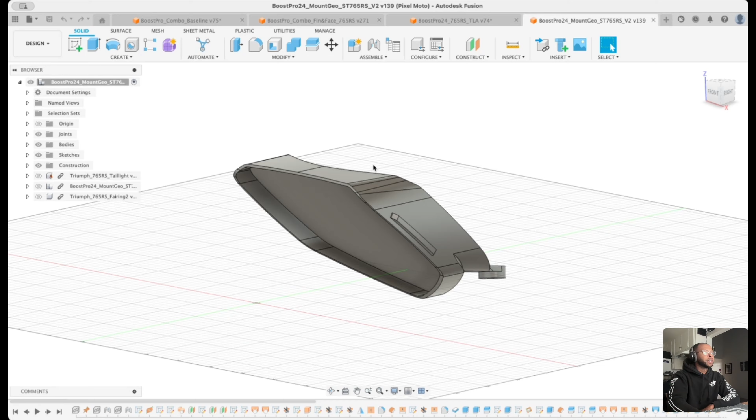What's going on, guys? Wanted to do a little bit of a spotlight that would cover some of the CAD parts that I built out in part one, as I'm not going to touch them too much in part two, but a lot of interesting work went into them.

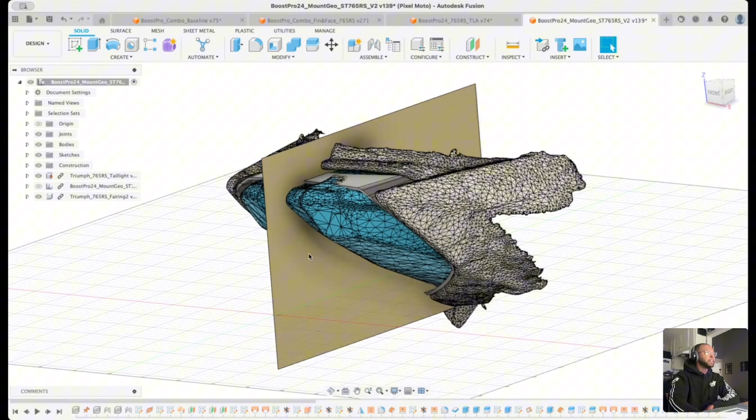So there's four main parts that I want to go through, and so I'll jump right in with this first one being the geometry, the back half of the geometry of the taillight. I built out a couple of different parts in this. And so I had, there we go, the fairing 3D scan that gave me a pretty clean edge on the inside. And then I also had the taillight scan that I was referencing for this.

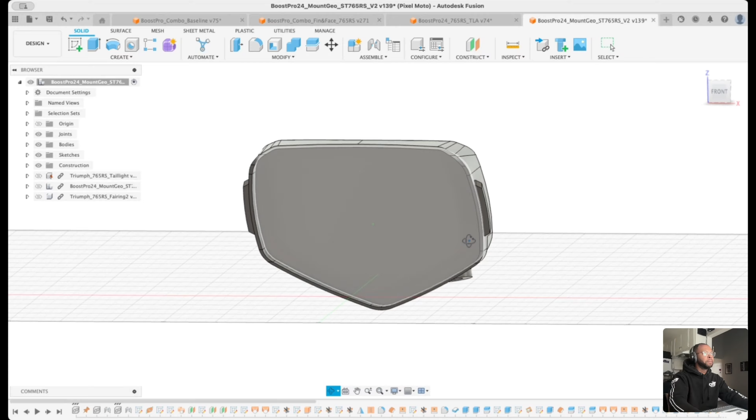And from using those as a baseline, I could start to get some of these simple shapes like this arc on the side, a very minor arc on the bottom, and then most importantly, the bolt points at the back. Another one that was pretty clutch to have in here was this kind of key slot for this geometry piece that I'll show you guys in another part that slid in the back to keep the top half of the light in place. But this ended up coming out pretty clean.

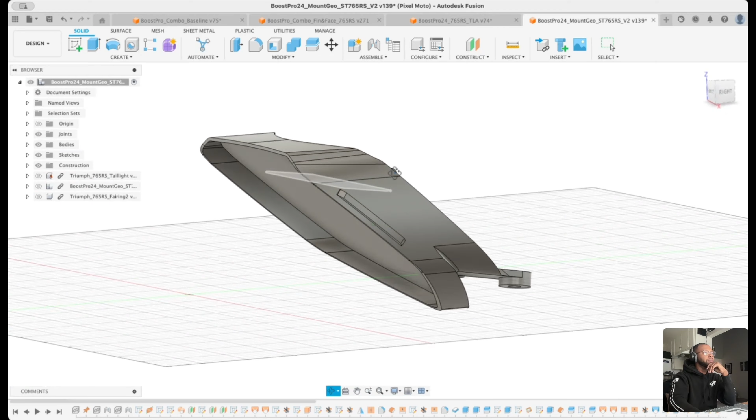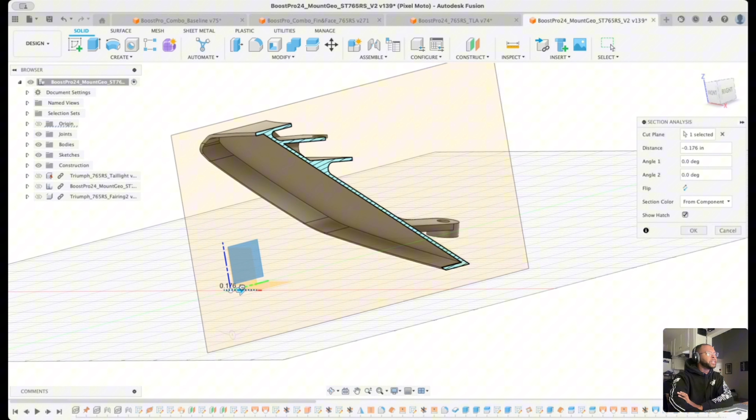But yeah, I did probably like 30 3D prints on this part alone, just trying to get it right and getting it to fit into the bike. And I'll also show the section view. As I mentioned, I wanted to keep this stuff pretty thin, and so this has a pretty continuous 16th of an inch thickness throughout the entire part.

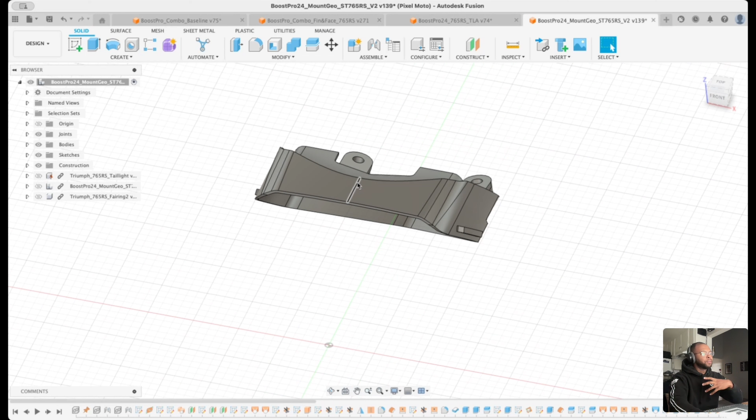No real innovation here, as this information and geometry was already defined in the taillight that came from Triumph. But as I started to build out my own taillight, I needed to basically redo all that geometry and design it for being on an aluminum part as opposed to an injection molded part.

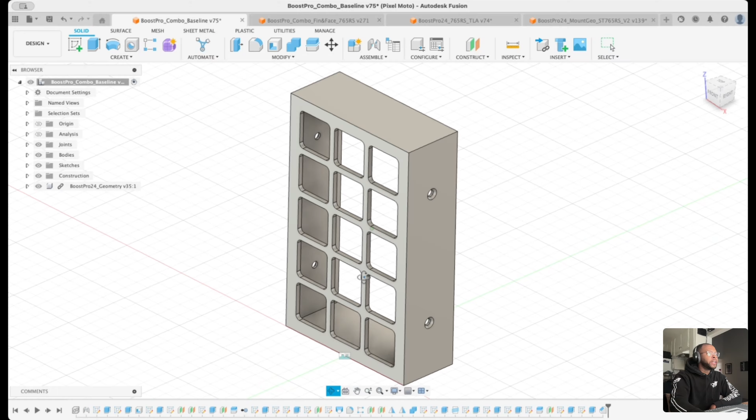The next part that I built out was the main face, which I called the baseline part. It gave me the baseline geometry of the rectangular taillight. So this had the 3x5 grid on it, which is very simple. But the part that took quite a bit of time was figuring out the correct size and pattern of the taillight. I knew I wanted to have a 3x5 so that I could do like a 3-2-1-0 for one of the animations.

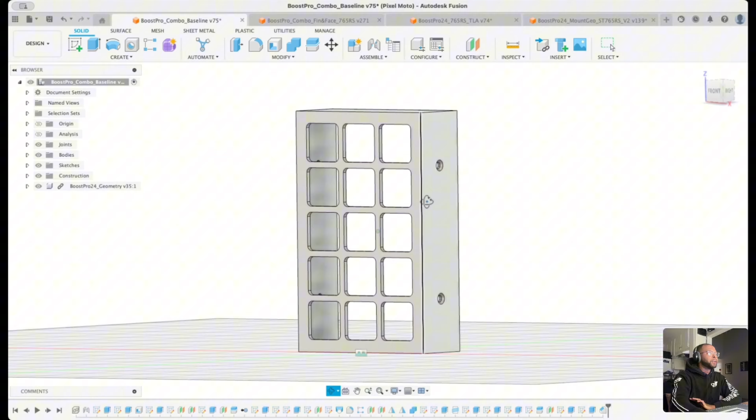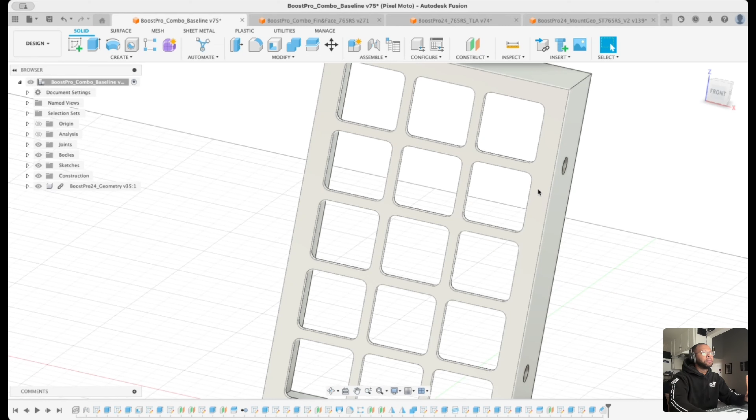So figuring out the pattern was important, but also figuring out this distance between squares and the edge here. I wanted to give enough distance to give me a nice overlap of the diffuser that was going to go in here. Also, not make this face or this part too wide, where the thickness and border took away from the actual squares themselves. So this baseline part was very important.

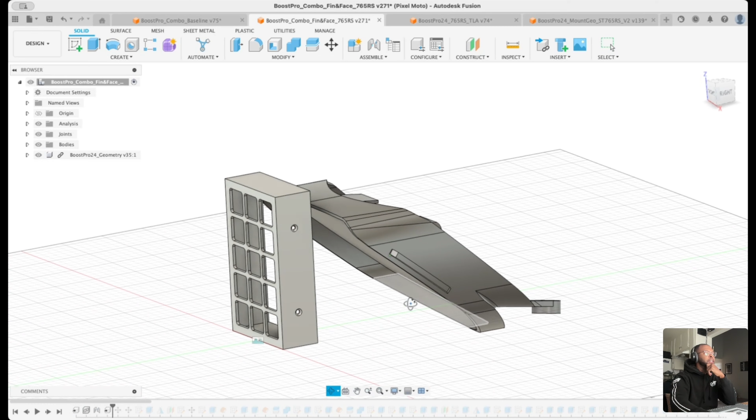And then when you come over into this combo part, see how the parts looked when they came in. So that's the baseline part we were just looking at, and this is the back geometry I was talking about. Splitting up these parts is just a trick I learned from working in aerospace: the less complexity you have in a given part, the easier it is to actually change everything, because similar to SolidWorks, Fusion 360 is parametric.

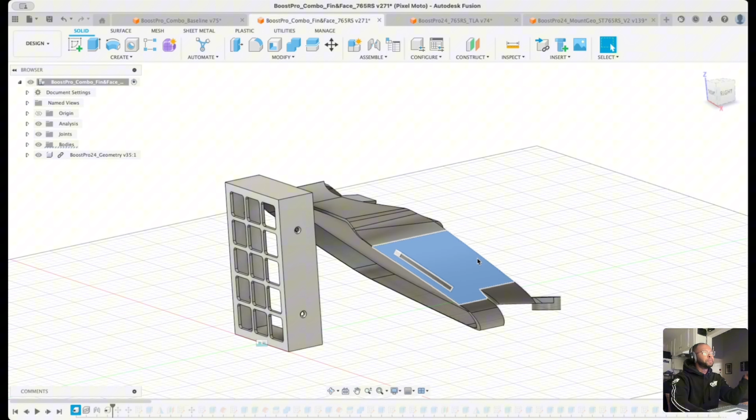So if I change a detail on one part, once it's been put into an assembly, I can go back to the original part and edit it, and then the assembly will reconfigure itself and update, and sometimes change features in other parts, and it works really well.

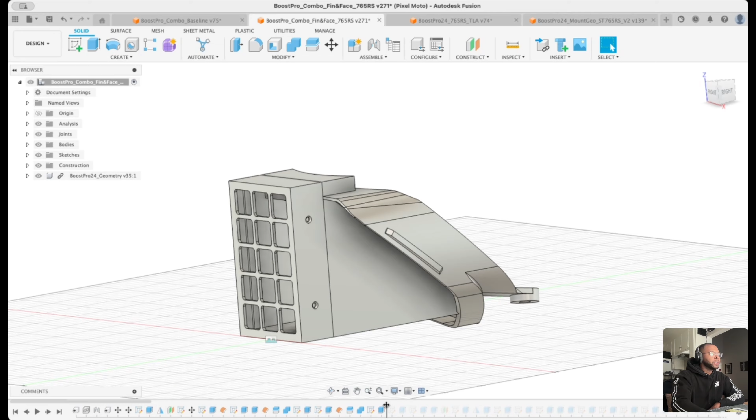So now to start actually making my way through the designing part, you can see I started to make some extrusions that would branch from the baseline part to the back half of the part. And since this part was still going to be machined out of 6061 aluminum, you can't just have a bunch of empty voids in here, because there's no way for even a 5-axis mill to get access to the inside of this.

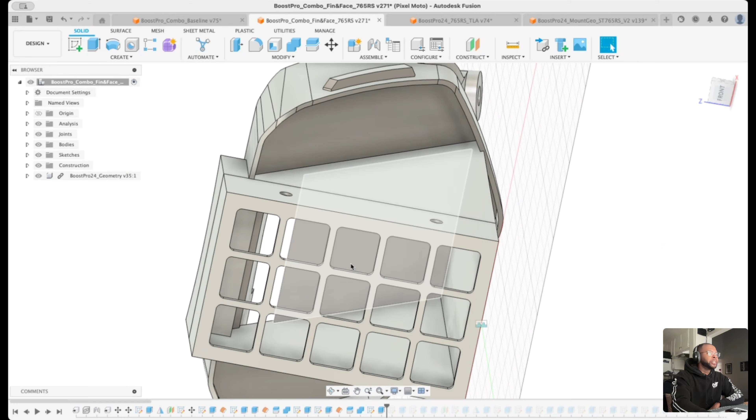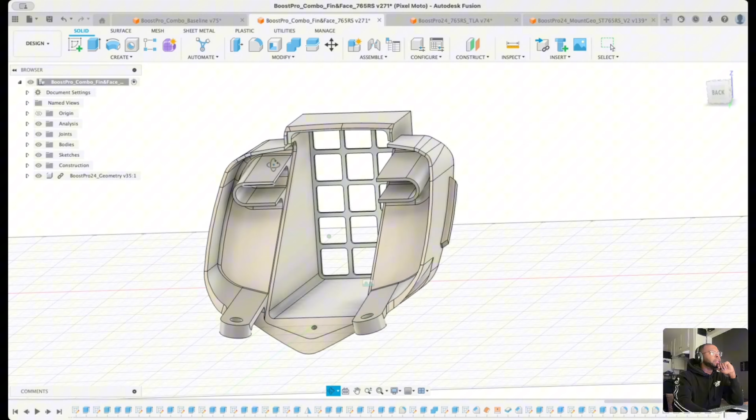So you'll see that I actually cut a big window in the back here. And then I actually ended up making a completely separate part that filled in that window. But you'll see I'll clean up some of these lines and cuts that I made on the inside of here. After I got all that cleaned up and did some fillets, I ended up with this main part that would be very easy to be machined, and I got some big fillets in here. And then I also had this second part that I had a rectangle in here for a connector to pop in, so that I could be able to get back out to the bike.

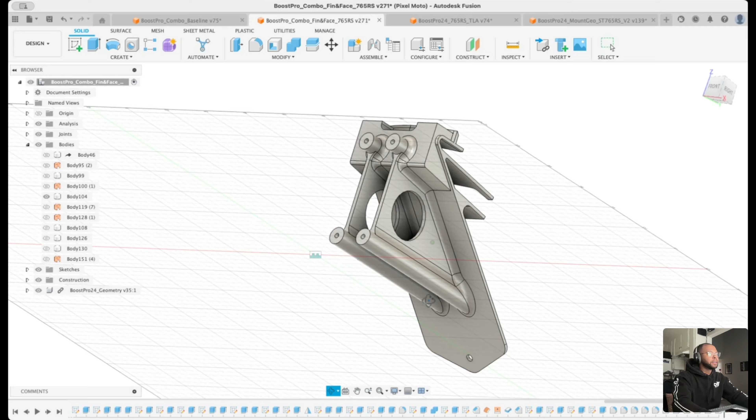So this is what the main enclosure looks like. And another thing to call out is that on that back piece, I made some extrusions that would reach out to grab the PCB board. And so these would be threaded M3 holes. So you could put the board right on the front and then bolt it down with M3s, and then the cable would go straight out. So yeah, that's pretty much all to call out for this part. And most importantly, got to have the Pixel Moto logo on the side.

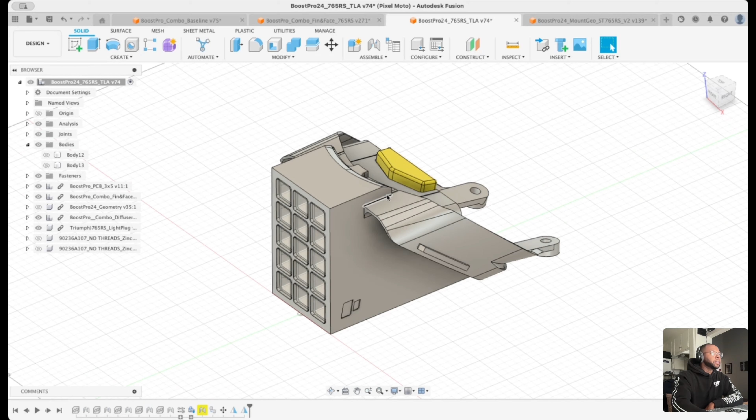The last part to show is the TLA, which is the top level assembly. This has all the parts combined into it. So it has the main diffuser, it has the PCB board that I'll show you guys, it has the reflector, it's got the main enclosure, of course, and then it's got this space claim for this key feature I was talking about. So I'm actually going to start with this.

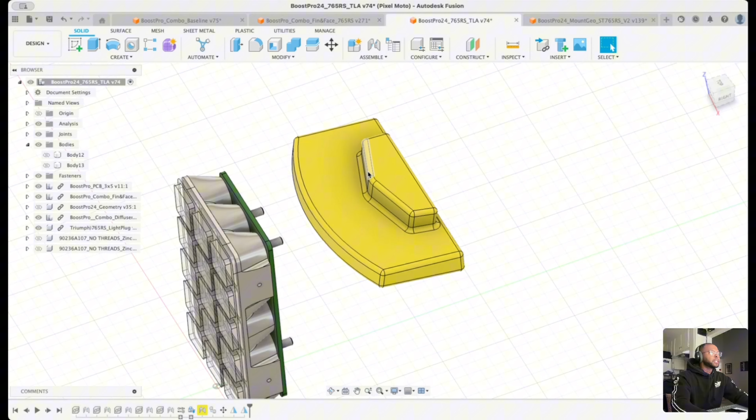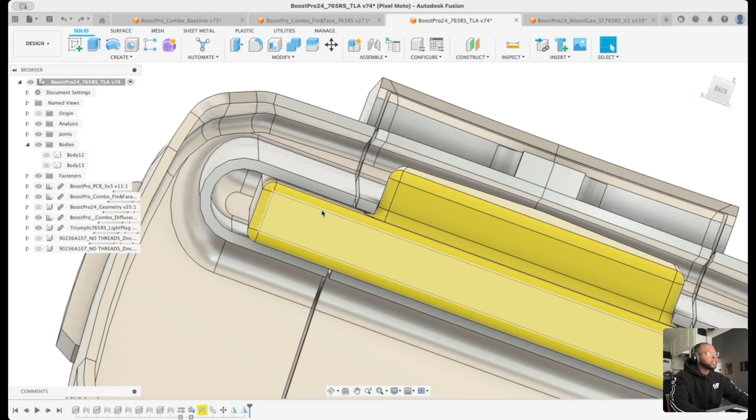So this key feature is something that the main bike uses. It does not look exactly like this, but a simplified version of it. And basically, this slots in and then gets bolted in a couple of different places. And since the light was going to need this to be able to mount back to the bike, I wanted to make sure that I had modeled it out so that I could use it to make sure that the slot that I had designed would work with it pretty well.

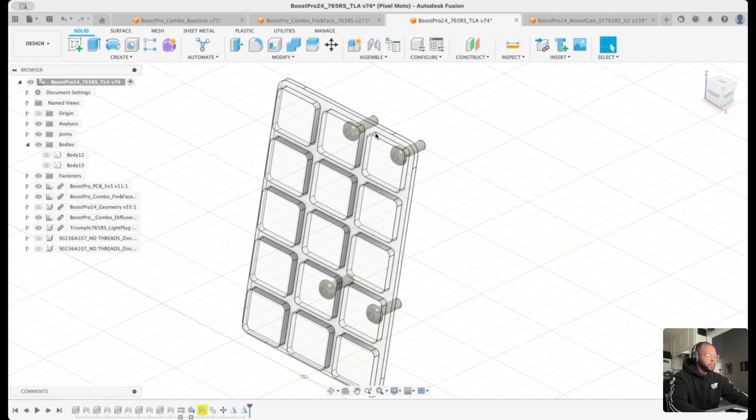We've looked at the main enclosure. There's no real difference here. And then the three new bodies to talk about here are the diffuser, the reflector, and the PCB board. The diffuser is going to just be machined out of a piece of acrylic. It's just a simple grid. I did a 0.15 millimeter offset for each of the rectangles so that I definitely knew that it would slot into the face of the enclosure pretty well. But it's a really simple part.

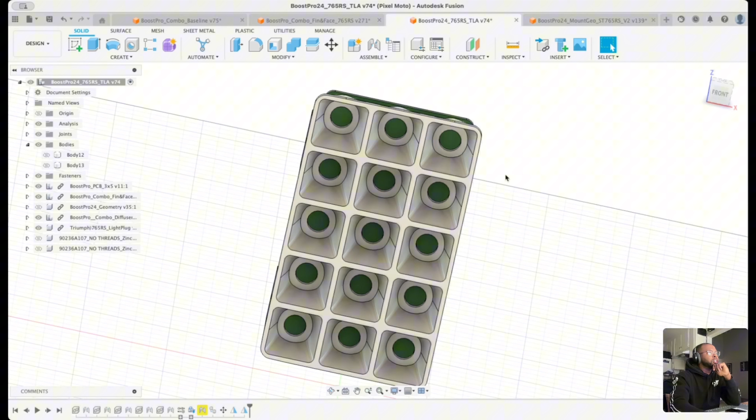Next up was the reflector. It's a pretty important part, as the idea here is to go for that 8-bit pixel look where it's kind of just like squares that are glowing. And when the LEDs are just on a board alone, there's a ton of LED bleed and light bleed that's going in and out of each other. And so I wanted this reflector to also be kind of the blocker, to allow the LED to only shine through the given block at the given time and then project that onto the diffuser.

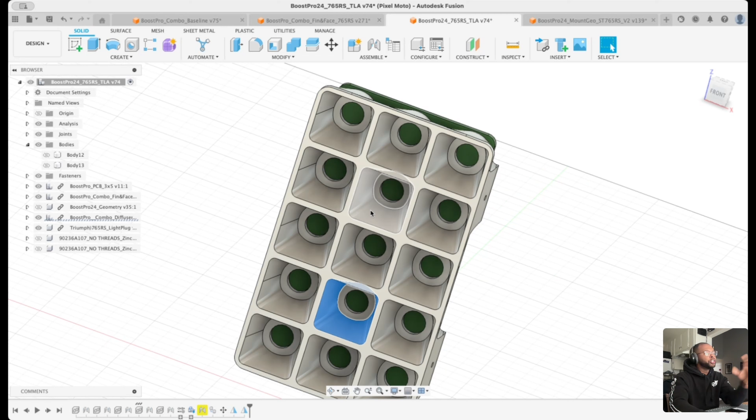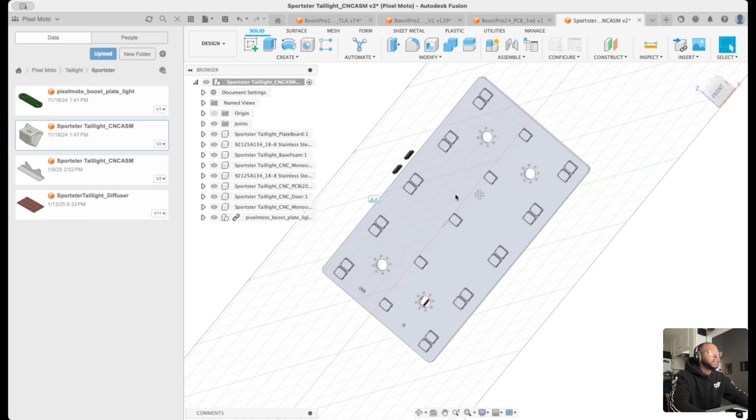To show the PCB board, I actually jumped into another part to make this, to give you guys a better idea of what this thing actually looks like. So on the back, you have a bunch of different components, and then on the front, you have the different LEDs. And what you see here is both red and yellow LEDs along the edges on the sides, and then you've got just red in the center. This will make sense when you see the videos come together. We got the yellow for turn signals, and the way I'm doing turn signals is just having them be straight lines on the side. This might change in the future, but yeah, it's the PCB.